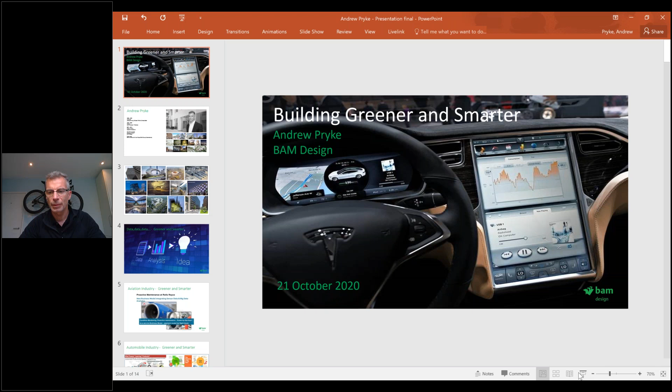I realise, thank you, Chloe, for reminding me that I've moved rooms. Most people have interesting books behind them. Unfortunately, I have a bike. Well, fortunate for me, but I'm not sure it's as interesting. But thank you, Chloe, for that.

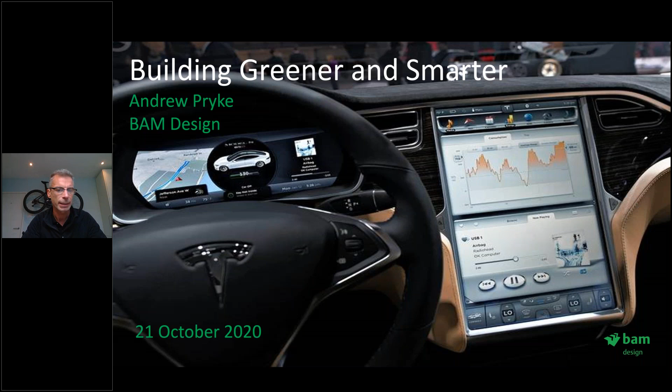Good afternoon, my name's Andrew Pryke, as Chloe said. I'm an architect, managing director at the 100+ multidisciplinary design consultancy wing in BAM. Part of the wider group, we deliver buildings, property development, construction and FM. I'm also head of digital strategy and sit on our international board, which is a worldwide business board for digital and DFMA. As part of these images here, I've been fortunate to have designed and led many landmark buildings worldwide with renowned practices.

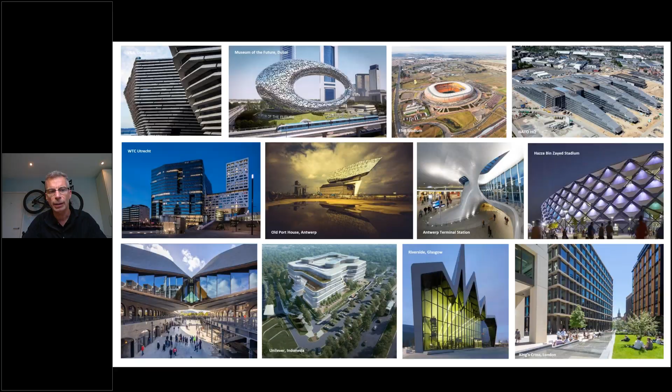I've also been very lucky as part of BAM in the last 8 years to be a part of the many landmark worldwide developments around the country, which I'm sure you've seen in many articles on Building Magazine. I won't go too much into those.

Today, really, I suppose one of the key elements I see is about data, and people talk about data, and I was trying to avoid saying data is the new oil, but I've just said it anyway. Data is transforming a somewhat low productive industry in construction, but I think it's a case of how we analyze this and how we use that data is becoming more and more important as we move forward.

Just looking at the aviation industry, many of you will know Rolls-Royce monitors every engine it sells. It's Power by the Hour. It has sensors that inform Rolls-Royce how that engine is performing and what maintenance it requires while it's in flight. Obviously not much work going on at the moment, but that's the principle that's been around for a while, and it's a different procurement method as well.

Tesla, as the image at the front of my presentation showed, have really disrupted the car industry, not only with electric powered vehicles and driverless technology, but also the way it collects data for when you plug your car in at night. It's part of a digital twin that sucks information and data from your car, analyzes all the cars that are plugged in, and then actually tries to look at improvements, and software updates are passed through at the same time automatically into your car.

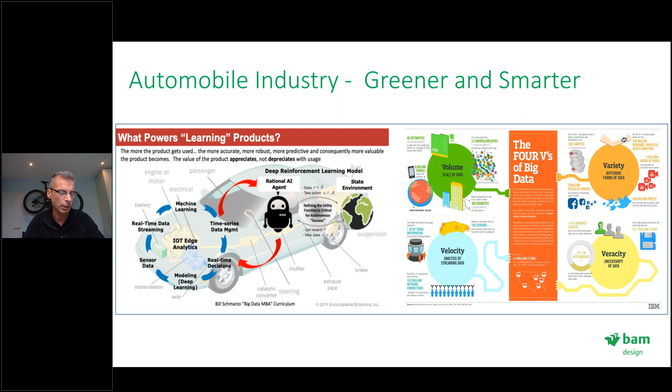So technology is around in other industries, but in our own industry at home, many of us have got various pieces of technology kit, Nest, or whatever, whether it's a light switch, whether it's a thermostat, whether it's a camera that's linked to your iPad, phone, or smartwatch.

That shows the power of that and how you can adjust that remotely, and how that data becomes very important and valuable. It expands really to smart cities and smart neighborhoods, whether it's collecting air quality, traffic monitoring for congestion and moving traffic lights, water quality, or looking at the weather to know when to turn on the sprinklers to water the parks and gardens. Google have seen the importance of this, looking at their smart city initiative in Toronto. I myself have won a World Architectural International Award for looking at the concept of converting Southampton into a smart city, understanding the data, looking at the key issues, and adjusting that as part of a smart city way forward.

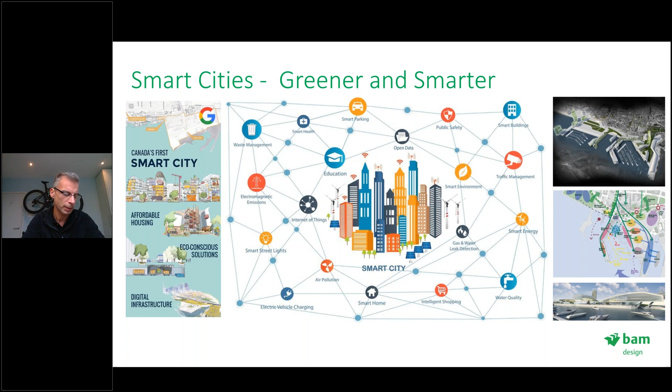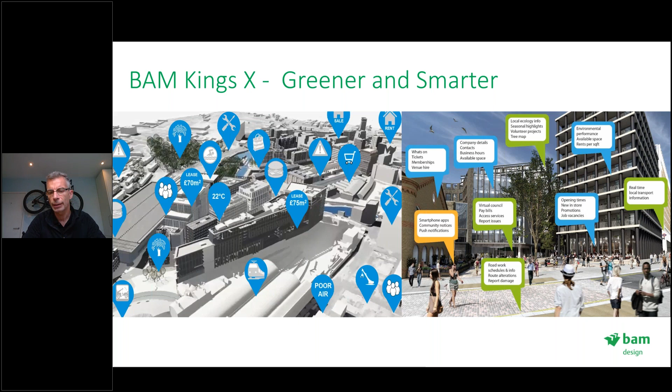Closer to home, King's Cross, London. BAM have designed and built almost 50% of the buildings there. My own team have digitally represented and produced a model of the whole development, Revit models detailed inside and outside of those buildings, which means that can be used as a vehicle for adding smart technology and smart data, whether it's the energy performance of the buildings, maintenance timing, or how products are performing. That can be an advantage not only to the tenant and landlord, but obviously visitors and users alike.

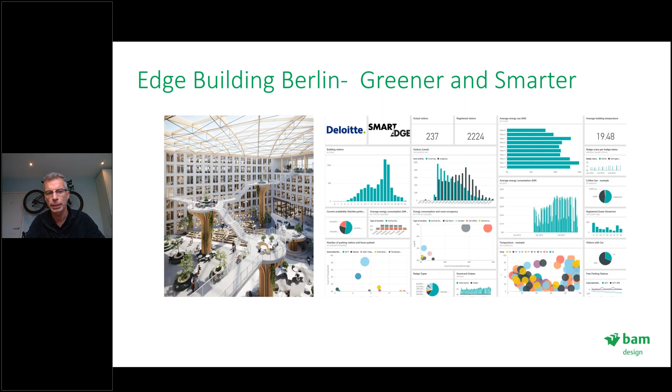We're also developing the Edge building in Berlin, with greener and smarter Edge technologies. That's building on the so-called smartest building in the world, the Edge building for Deloitte in Amsterdam, where employees use a smart app allowing them to understand traffic to work, whether they should go into work yet, manage their diaries, book meetings, order lunch or coffee, and control heating, lighting, and air conditioning all from one bespoke app. A lot of these things are available, but having one app makes it bespoke to how you use it. This in turn allowed Deloitte to understand the best way to use the building from an energy point of view, security, and which areas can be used.

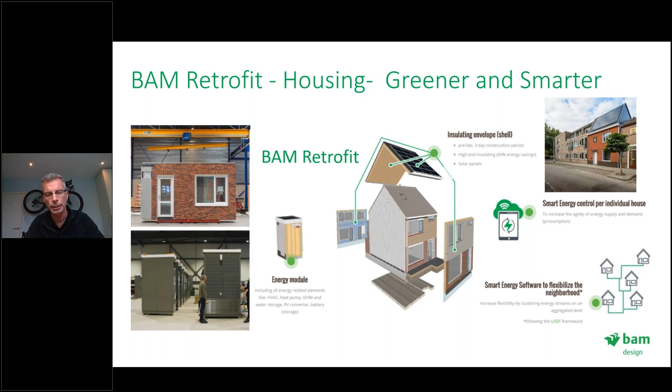Closer to home, back to BAM again. BAM are looking at retrofitting buildings. They've built about 400 of these now, retrofit housing solutions for our 50s to 80s housing stock upgrades, recladding walls and roofs with prefabricated panels, the roof being photovoltaics, and installing new prefabricated energy modules, which you can see on the bottom left. We're applying these to produce low-cost energy performance houses, and the houses are all monitored to allow usage data for further efficiencies and for the benefit of the whole community.

Andrew, one second, sorry, there's just a little bit of interference on your mic. If you turn it on and off, sometimes that works. Very high tech, I know. Okay. How's that? A little bit better. Keep going.

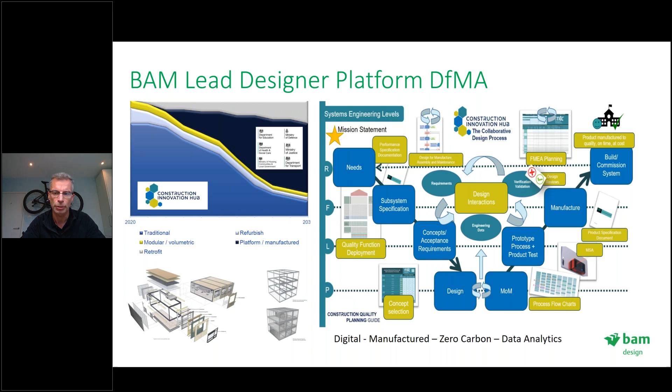Okay, no problem. Yes, to extend the off-site zero carbon and digital efficiencies, BAM Design is the joint lead designer working with the Construction Innovation Hub for a new UK government program to accelerate DFMA and zero carbon, through an initiative to create and build a platform DFMA solution to provide further efficiencies to benefit the 6 government departments that procure built assets. This is the program, as you can see on the bottom left, looking across offices, prisons, schools, health facilities, etc., to move that forward.

Lastly, bringing this all back home, we've all heard about the Leesman Index and surveys. I attended a meeting in February where everything was normal then, and the focus there was that productivity is higher where you have a sustainable environment in the office, but also where people have desks, their own desks, so they have a base to work from and they're happier, therefore more productive. Obviously now we're in a totally different situation, and the so-called new normal is where we're working. That is where a development we've looked at in BAM, called Smart Tower, comes in.

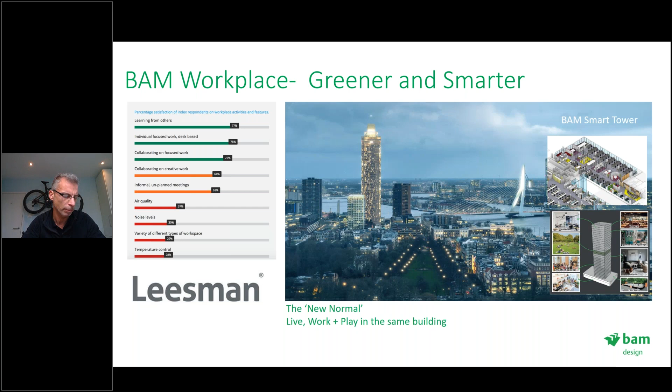This is addressing the new normal concept, a zero carbon circular economy solution to maximize inner cities using off-site manufacture. The tower is more in line with the American model, creating live, work, play hubs all in one environment. You're not commuting to work, you're remote working, but all those facilities are all in one space. The sensors and data analytics will monitor the building's usage, predict efficiencies, and allow occupants to have their own bespoke app in relation to their live, work, play lifestyle. So the question raised is what is that new lifestyle? Are we remote working now, or is everything getting back to normal? I'll leave that there and we'll pick it up later.

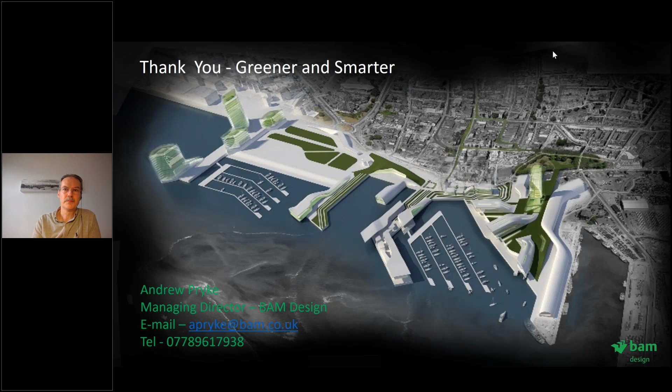Just on the screen. So I'm going to talk a little bit about our work dealing with manufacturing and how we see a digital, smarter approach happening as a practice, as a design practice, and how we operate. We operate across many disciplines and many different building typologies.

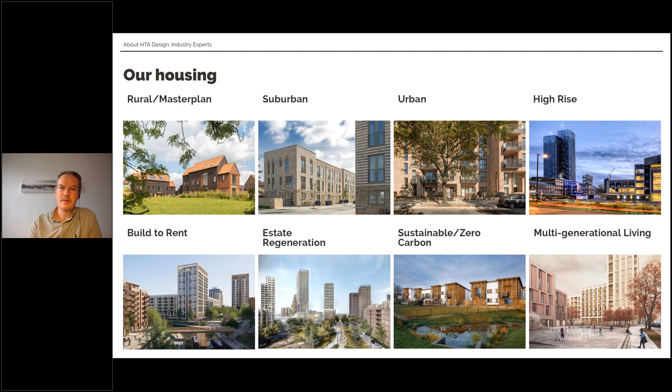Recently we've published a couple of books on the topic, which the audience might like to dip into at some point, on volumetric housing on the one hand and on different typologies of housing, or radical housing, on the other. We've been working on offsite projects with increasing regularity, to the point now where it's probably a third or so of the practice's workload of about 200 people. This explosion is in part digitally enabled and partly because of the more sophisticated nature of manufacturing and contracting that's available to us and to our clients now.

And we feel that it's important that we, as a sector, the design disciplines, really are digitally enabled and capable of providing information to manufacturers and contractors that enable all of this process to happen.

The benefits to it that we've seen are pretty obvious, but it's only delivering perhaps, well, certainly less than 10% of the industry's output, and probably closer to 5%. So there's a long way to go in terms of the adoption of more manufacturing processes in the design sector. We as designers, I think, have a bit of a job to do to really catch up somehow with some of the other industries that supply us very well with things like phones and computers and cars and most of the other products that we work with and use in our daily lives.

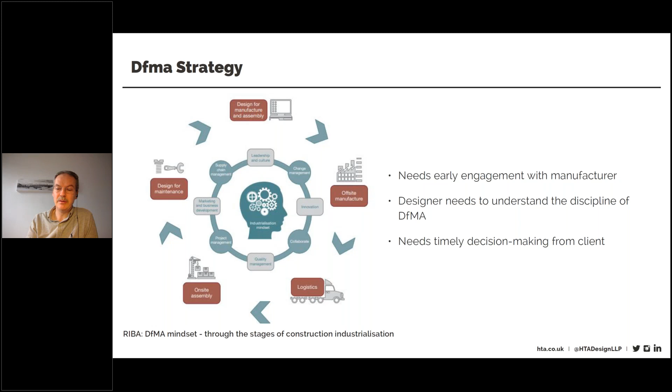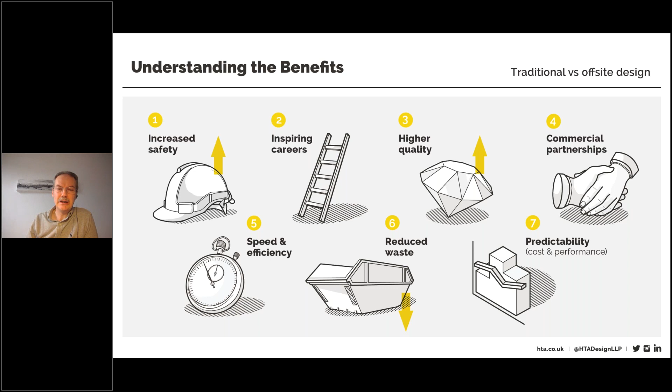The benefits: it's safer. People working in factories is safer. Our sites are still dangerous. It's inspiring for young people. The digitally enabled manufacturing future is much more interesting to people than carrying bricks around on a muddy site. We get higher quality buildings. It's more predictable from an investment perspective, and it's much less wasteful.

For us as designers, I'm not going to go into this slide in more detail, but basically we also spend a lot less time on the building projects than we would under a traditional contract. So it's not only beneficial to the end user who gets the building earlier, it's not only beneficial to the client who gets the building more quickly, it's beneficial to us, the designers, and enables us to build our workload, build our projects more quickly.

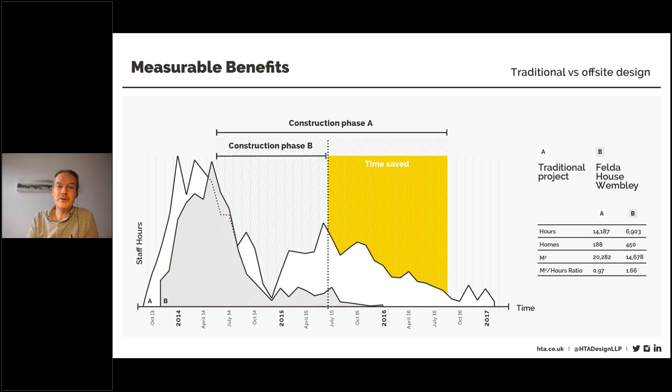In research that we've done, it suggests that we're saving about 40% of embodied CO2 compared to traditional in-situ reinforced concrete frames, which is how the majority of buildings, certainly apartment buildings, are built in the UK currently. Given that we're pretty good now dealing with operational carbon emissions, the embodied carbon emissions of projects is the next big thing, and we expect, we hope, that this will come into regulation in the near future.

It's already part of the intended London plan, which is a signal really to the sector to start getting our house in order.

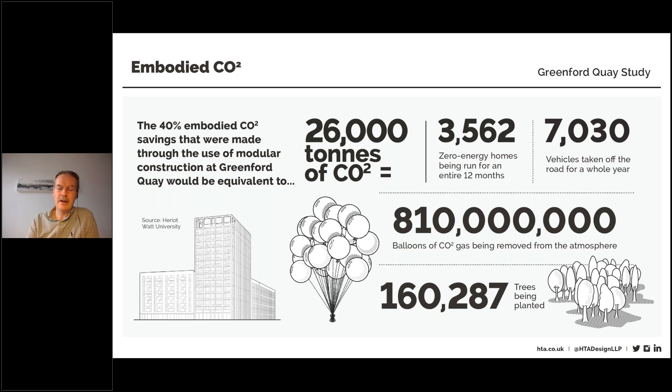So we see prefabrication as being a major boost to all of this. In our projects, we've saved up to 50% of time compared to a traditional program, which is an enormous saving when you think of, say, the rental income from a building. Getting an extra year of that rental income, for example, can be up to 10 or 15% of a project's value. So even if prefabrication added 1 to 5% of project costs, the fact that you can get rental income a year earlier would more than pay for that.

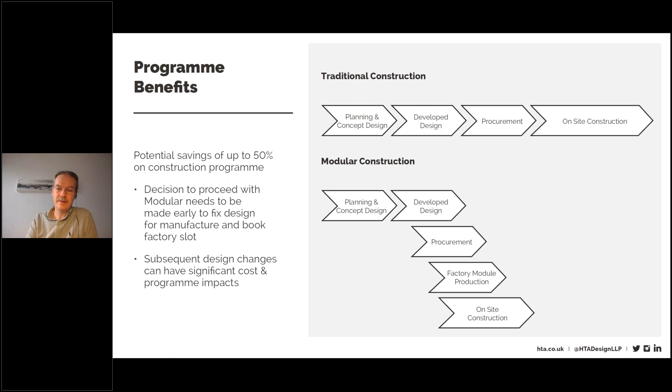So the advantages are pretty direct and pretty obvious. And for somebody doing larger scale projects, the advantages become even more obvious and direct. So many of our clients who started out being skeptical about this have now taken on the idea of prefabrication as being a core business practice for them.

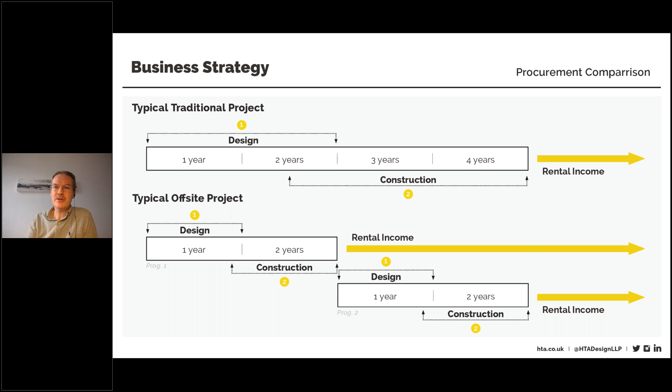And 2 of them are considering setting up their own production facilities so that they can take over production from the contracting industry. So I don't think we need a clearer demonstration of the fact that it's a pretty good idea than that.

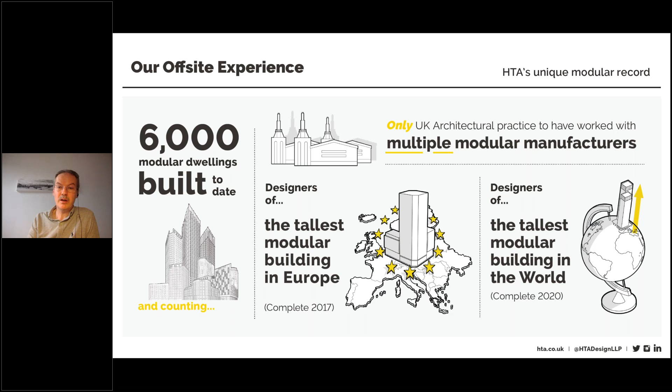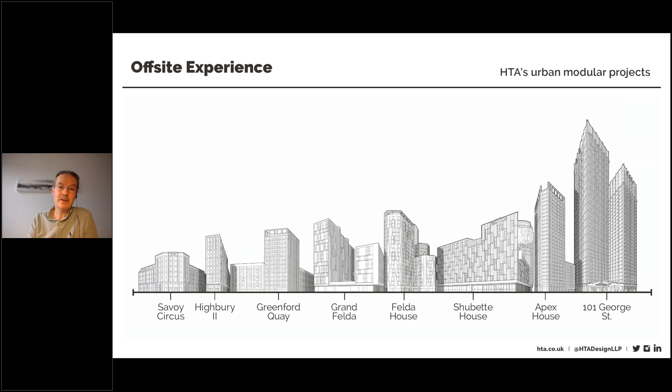And to date, we've built about 6,000 homes, units, student accommodation spaces, hotel bedrooms, and so on, including the tallest prefabricated building in the world, currently completing in Croydon. This demonstrates the spectrum of projects that can be used. So the technology has now come to the point where it's mature and ready for large-scale adoption. But what is missing is a pipeline of demand from clients, because production facilities cannot behave like a contractor and grow and shrink to meet fluctuating supply and demand. They really need a pipeline of demand.

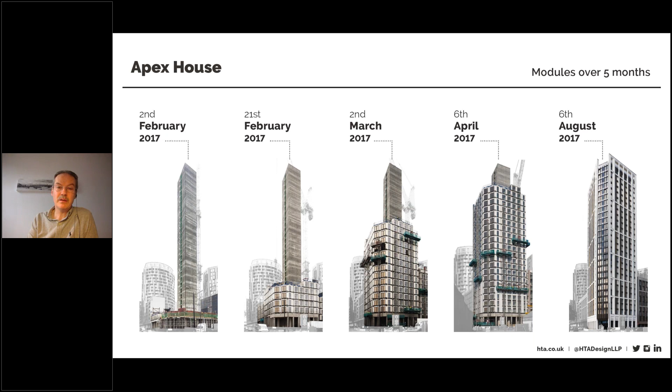To illustrate the end-to-end process, we started working on this project in 2015, and it opened in August 2017 - a very, very quick project process. This illustrates the variety of spaces we've built in many of our buildings, all of which came from factories and were fully complete inside. So it's not as though it restricts the design process or the brief, but particularly for housing and cellular buildings, it seems to us to be a bit of a no-brainer.

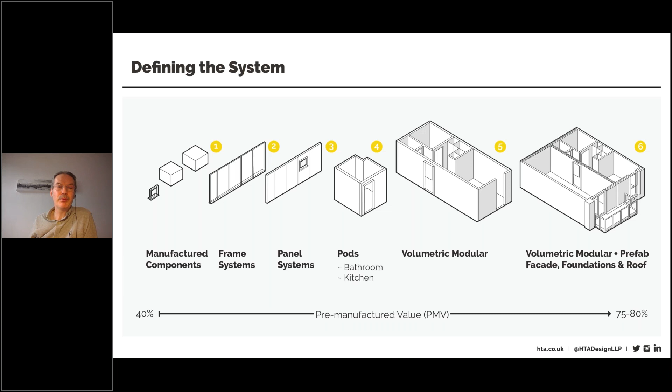I'm going to stop at that point. I suppose, other than to say that in digital terms, what is necessary is a design sector capable of feeding the supply chain with digital information, which enables all this to happen. So I see digital data processes as being the oil, or the lubricant, which enables all of this to happen. Without it, it's still going to happen, but much more slowly and less effectively.

Okay, thank you so much, Rory. That's really interesting, and I think some points about the client's role we may well come back to, but it's really interesting to hear you say that there are 2 of your clients considering setting up their own manufacturing facilities just to ensure that this is done. That's something maybe we can come back to.

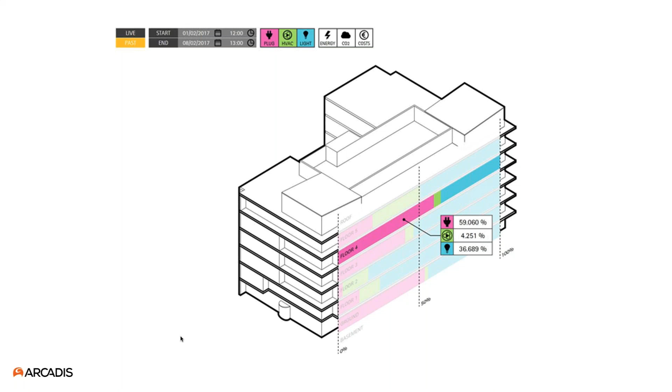Another example, some of the technology I worked on in the Salesforce Tower in San Francisco basically helps you see how your teams use the space, which I think is really important for COVID going forward. Whether that's contact tracing, or around having better desk sharing ratios or layouts, we can take this data, compare it to what the building management system's doing, and go for some real live energy usage on the basis of real-time demand, which today in a building management system we do through a lot of schedules and alarms.

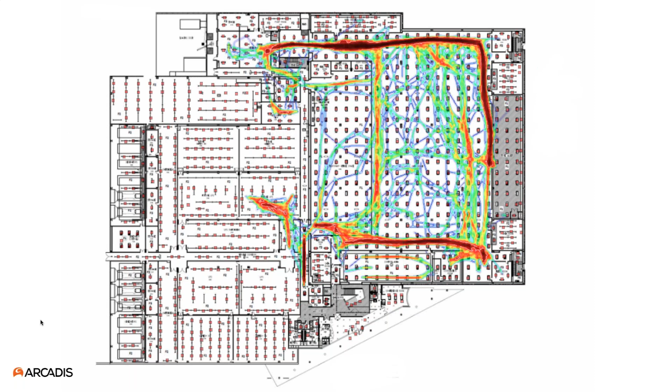Now, if you look at that on your building management system, the fact is they're operating, there aren't any issues, and the right set point's being delivered, which is why they're not intelligent enough, and why you need something like building intelligence to help you deal with these sorts of issues.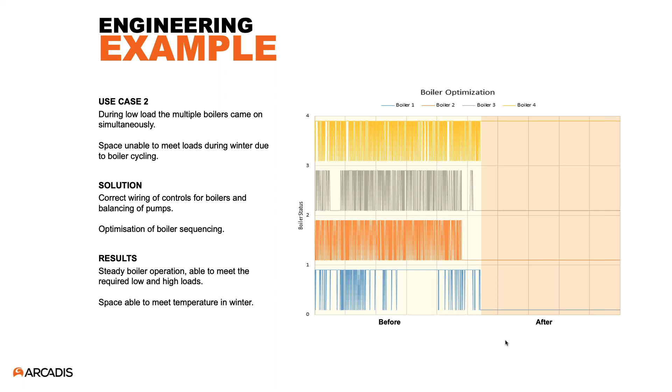To finish, I think there are a couple of key considerations I'd recommend when you're wanting to do this sort of thing. Firstly, having the right place to put all your data in the form of a platform. It's about having your data named correctly so it's easy to deal with, using a standard called Haystack, and if you're feeling fancy, a meta structure called Brick.

And then finally, considering how you're going to deal with security using something called MUD, Manufacturer Usage Descriptions. That ensures you don't have something like a fan coil unit doing things on a network that it shouldn't be. So with those 3 things, you've got the start of a recipe to start looking at how you can move towards net zero operations within your building.

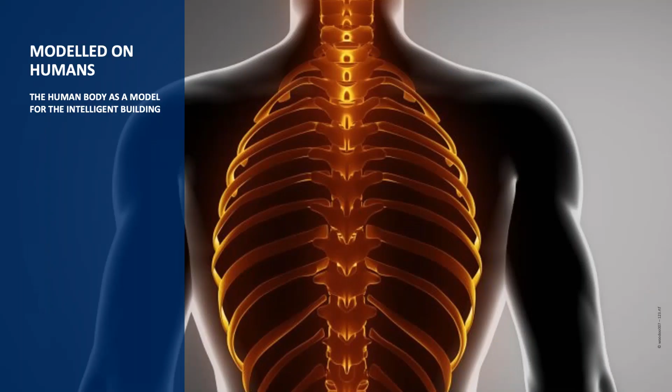Some of you may have heard of this, sitting to the left-hand side of the station, right in the heart of Berlin. Cube is renowned for being one of the smartest buildings in the world at the moment. It does that through a number of things, not only through exemplar design, both interior and exterior, and its location. But one of the things at the heart of it, in terms of its initial concept and design, was to think of it based on some of the attributes of our own human bodies.

So it's not just looking at the skeleton and the frame and the facade and the skin, but really thinking about the network. What makes it all work, bringing these things together? A lot of the technologies we're seeing and hearing of in building and construction, some of it's been around for some time, but actually linking it all together via a network has been one of the essential successes of Cube Berlin. But the main attribute is really the brain, the function within the building that really links all these things together.

As we've heard before, it's not just around grabbing the data. We all know that everywhere now is producing masses of data, but it's also using it in a meaningful way. And that's just not producing dashboards, because almost by their very nature, dashboards are historic. It's really thinking about predictability. And that's really the key, both to supporting buildings as assets, but also cities and communities as well. So the brain is the real clever part of a building like Cube Berlin.

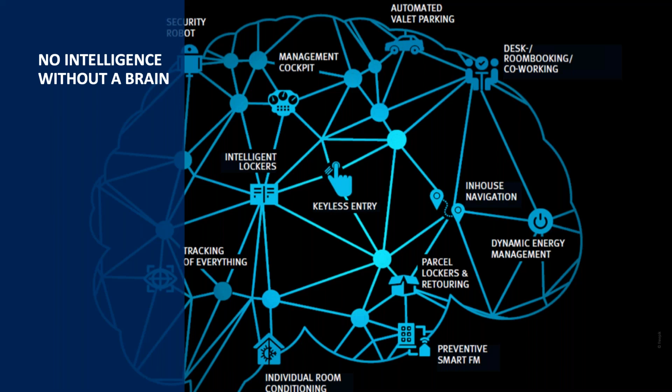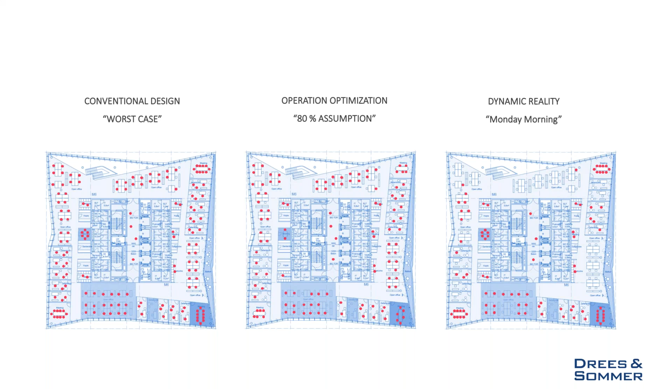What we've also seen, as Cube is an office, is the old models where the layouts are there, but rarely are offices fully utilized. We've probably all seen via Leesman or other post-occupancy surveys that actually 60-65% of desks are only ever occupied at any one time. And then if you take the Monday and Friday aspect as well, that can drop to below 40%.

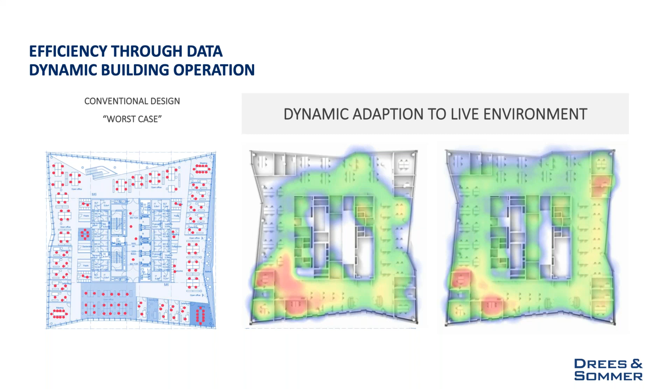So being able to know what's going on, as we also saw with Salesforce in California, but also looking at where that high usage is, where we can challenge either the facility management service, but also in the COVID environment as well. Lots of people are working in teams, where we can drive the teams in terms of their wayfinding, so that we're keeping people safe distances and also linking them together to see where that building usage is. So using the data that the beacons provide is giving that dynamic environment.

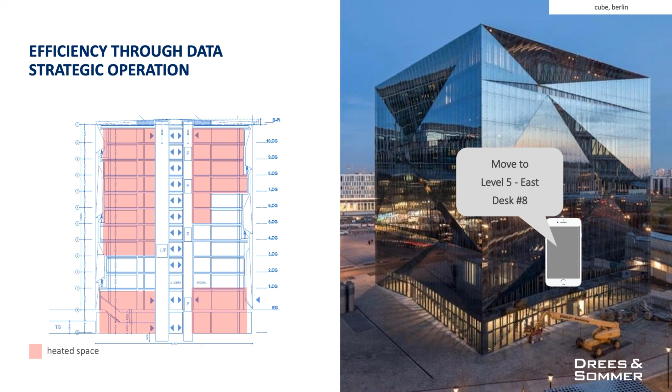But also, what we're finding again in the COVID situation, is that many buildings are nowhere near fully utilized, if not even half. So really, why target all the services in terms of cost in use on those floors that aren't being used? Being able to target that, Cube Berlin has the ability to close off floors or significantly reduce the air capacity on each floor, so that they're really targeting it and making sure that from an energy consumption point of view, it's only really where it's needed in time.

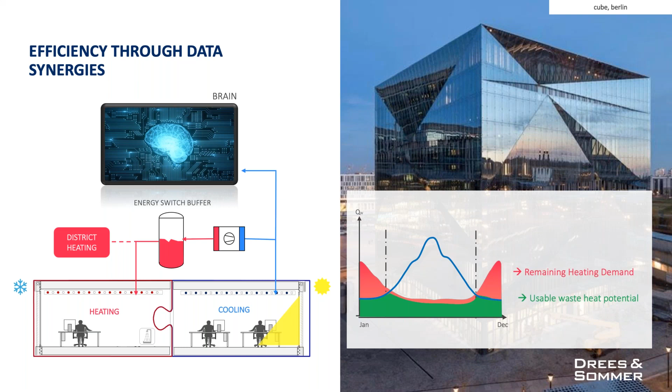Also, it has the option and capability of actually producing its own power and exporting this as well. So the future is not just individual buildings, but exporting to the wider grid where there's that capability. And as we heard about Tesla very early on, battery capabilities are growing day by day, and actually exporting the power to the grid and sharing it across wider networks is also one of the big futures, where we see buildings as part of a whole network.

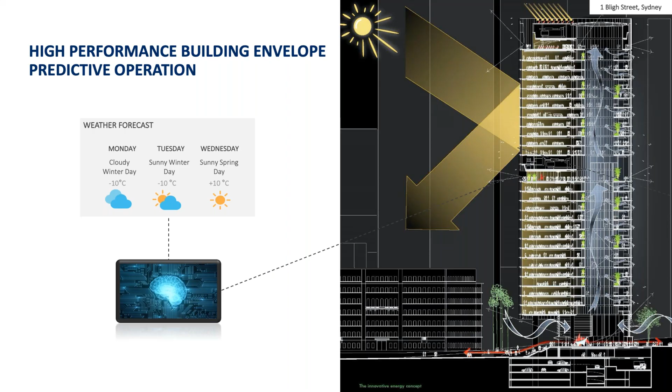And again, talking about energy in terms of what buildings and functions can produce, is looking at ultimately over an annual cycle where they're plus energy cases - where they're able to produce energy and share it. And these business cases for a lot of these facilities within modern buildings, make the business case write itself. So plus energy is a major success for the cleverest of the buildings.

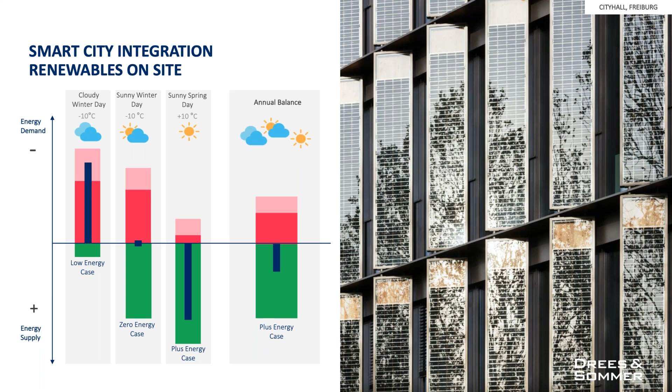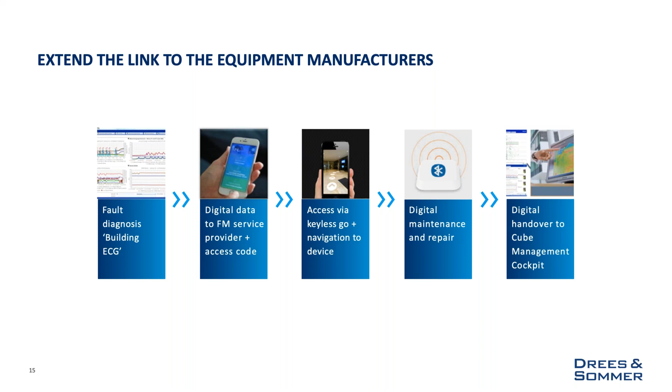Linking then Cube Berlin and others into the manufacture, and also taking the Rolls-Royce example, where the equipment in the buildings is being shared with their manufacturers. So again, not only are they seeing what's going on, but they're also able to predict things, see trends, and support these equipment classes before they fail, hopefully. It's just about sending the data and providing better information.

And then there's seamless moving around the building through keyless entry, through wayfinding. We've seen the thing about dynamic energy and also delivery of parcels. All of these things are not overwhelming in themselves, but the real trick is to bring them all together - waste, elevators, and particularly charging, mobility.

Cube Berlin is very successful in using its network to bring all these things together, to the benefit not only of the building occupiers, but also the building owners and the property management and facility management teams. So getting the brain working well could be the benefit of everybody.

What we're also seeing, as we mentioned before, is this ability to export. So instead of being consumers, they're prosumers. Battery storage is critical to this, but also there's the opportunity of monetizing this through blockchain and other financial mechanisms. So the communities then start to pay back to themselves rather than just be costs and overhead.

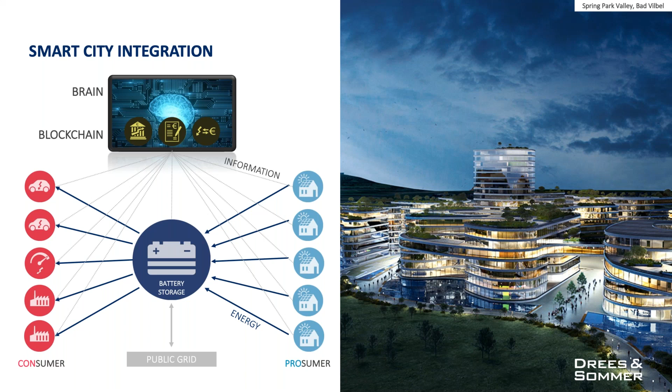One of the best ways to get to using less carbon, particularly embodied carbon, which is one of the bigger uses in construction, is not to build it at all. In this example, Cube Berlin, through its smart technologies and efficiency, managed to reduce a significant height of the building compared to what it would normally have done using older technologies. So it was able to reduce itself, and therefore avoided all this embodied carbon that a normal traditional construction may well have taken it to.

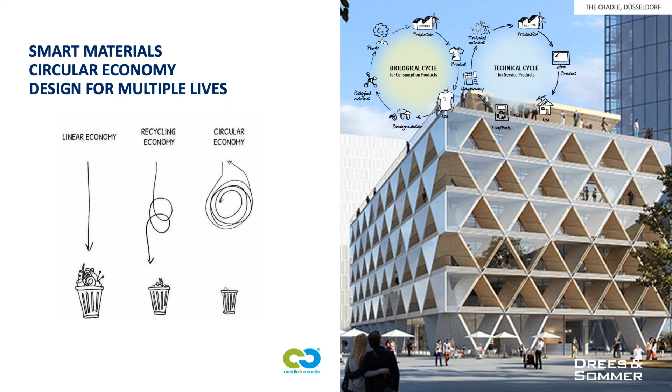And also the circular economy, a massive contributor to how we're going to get to zero carbon, is using the right materials again and again. So it's not just digitization, but also thinking about what we use and how we use it. The path to zero carbon is driven by digitization without a doubt, and cost in use and being smart about how you use your buildings, but really getting over to the circular economy takes not only the embodied carbon down, but also really challenges the operational carbon.

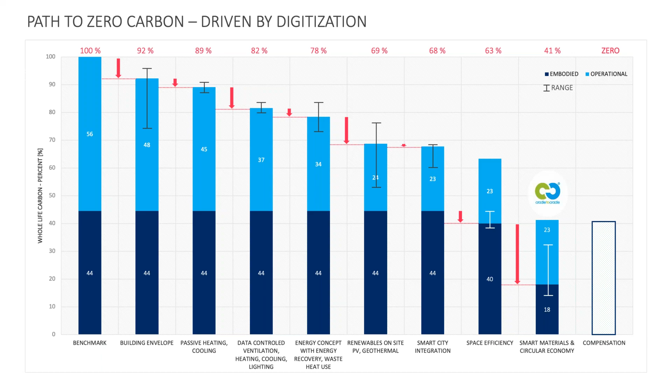But why do we build these buildings, particularly something like Cube and maybe Salesforce and some of the other ones we've heard? It's really for us as people - we're in there, we're working. One of the workplace holy grails for many years was making these workplaces more productive for you. Now that's very difficult to prove in many ways - I think Matthew and I found that today, just trying to get our webcams working, we probably spent 20 minutes prior to this call trying to do that. So you could argue really how productive is that?

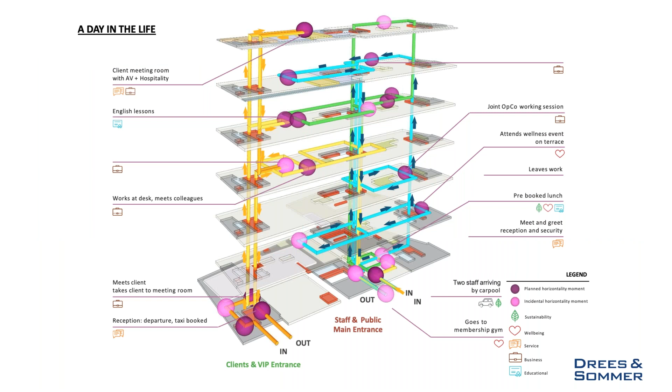So actually where smart can really help is not so much making us productive, but taking away the barriers that make you unproductive. Because as you channel your way through a building, you've got many interactions and many capabilities, whether it's planning your arrival, ordering your food, your coffee, your gym trip, meeting your client, having presentations.

I think we heard from Andrew around people wanting a desk, being able to sit and be productive, being able to book that and know it's there. So technology and the smart capabilities of buildings really help people to be prepared, and then their productivity is down to them. Smart technology, when it works well, really can unblock that, but it does need to work well. And even just today on this call, we've seen how sometimes when technology isn't joined up - in this case, our webcams - it can make you slightly less productive.

User experience just comes down to a phrase now, which is really looking at how you connect with your building and with your company. It's not just smart that is important for any building now - great design still has a great role, linking company and the services and their products with their people. So we shouldn't reflect that it's just around smart and technologies that make successful communities and buildings and workplaces. Great design has its place too.

So it really needs to be attractive, particularly as we can see how the workplace may change moving forward, with more of us working remotely and then coming into the office for more structured sessions. You still want to make it attractive and give, when you're in there, the connection to the company and the brand.

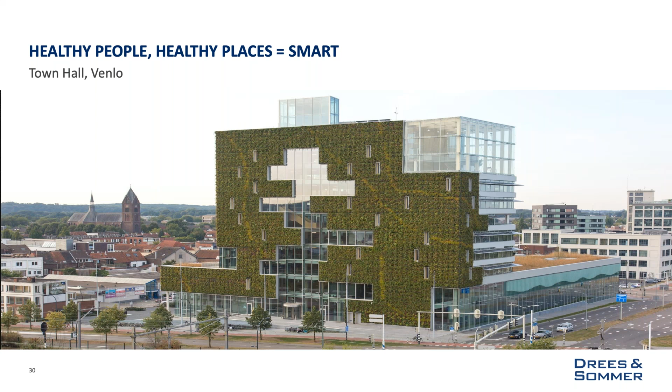And here's an example here, just as we get towards the end, of Venlo in the Netherlands - a very healthy building, designed really to help the occupants be more productive, be healthier, be happier in the workplace as well. And at Drees & Sommer, at our headquarters in Stuttgart, we're building OWP 12, again, probably eating our own medicine here, where we're really looking at creating the healthy, happy and productive building environment.

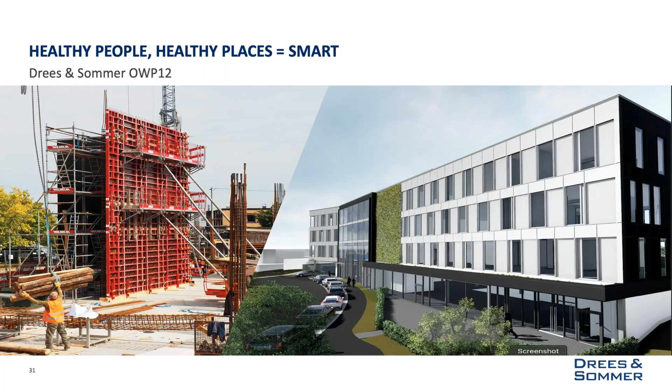So really for us, Smarter and Greener is about the user experience, but not just us as users. It's about the experience for everybody across all the asset classes. Thanks very much, Chloe.

Wonderful, thanks so much. And despite not having webcams, it did all work, so brilliant.